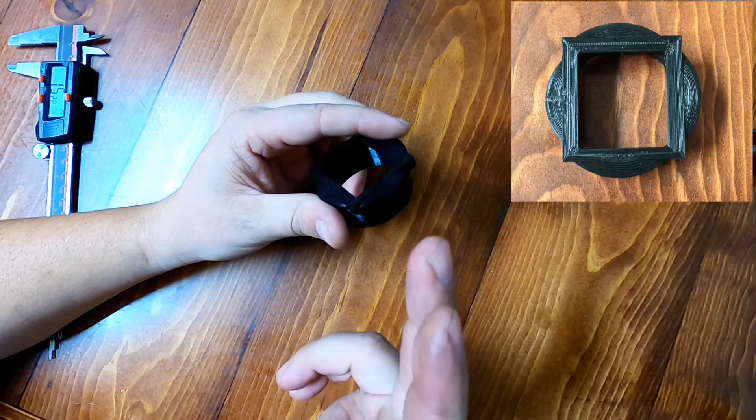Now the design that I made isn't that elegant. It involved a circle, a square, and an oval, or sphere, disc, whatever. Combine three shapes in one, make it a little easier for me to grab right here, but make it basic enough that I can put the GoPro right in it.

And this one, it does fit one way. As you can see here, it does fit fairly snug. Hopefully the camera picks it up pretty well. Fits in fairly snug that it doesn't come out.

So I tried it here as close as I could, but again, this was only a prototype. Didn't even think that it was going to work as well as it is. And it's been doing really, really good.

There's a couple of different ways that you can make this, but this was just mine, and I actually made it in, oh, is that Windows 3D? It was just super, super basic, and I'll go ahead and show you in a little bit what that was.

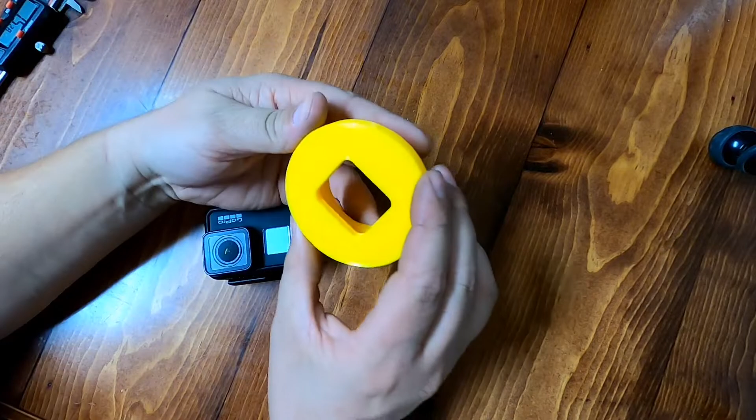But the original piece that I was using was something that a friend had made for me. He found this on Thingiverse. Now, the only thing I didn't care about this is that it did come in multiple parts. It is a lot compared to a little.

Yes, it looks cool. This one goes directly onto the GoPro itself. This one adheres really, really well as well. I think actually a little too much. So it's kind of difficult, but it does look really, really slick how they made it.

It's nice that you can go ahead and just have it like this. So if this is attached to your spotting scope, you can go ahead and put it on, latch it in. When you're ready to take it off, you're done. Mine's just one piece that goes on, comes off.

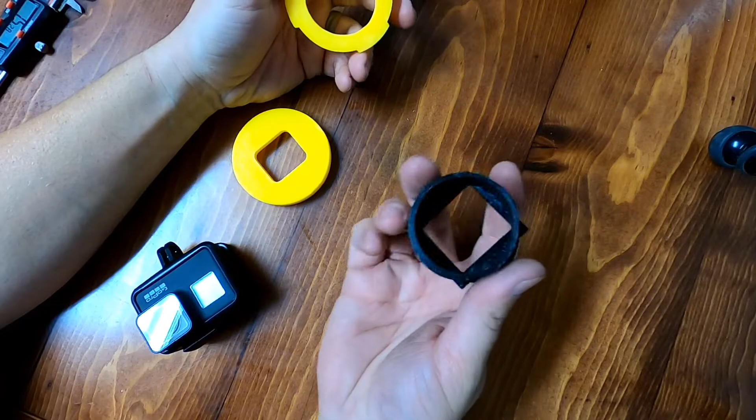The only thing I didn't care about this is that when I did go ahead and try to attach it, it had a lot of give. Now, my friend printed it out and he didn't have all the specs specifically for it, and we were just trying to use this plastic cover that was on top of my spotting scope. And this actually pops right off, so it didn't make too much sense to use this on it the whole time, just because if you try to pull it off, this whole thing comes off, and yeah, anyways.

So yeah, it works, but I didn't care for it. I think this fits the Hero Black 5, Hero 5 Black, and they're all pretty much interchangeable. I think there was just a slight size difference in this, but pretty much the same.

But what I ended up doing, instead of using this, which I didn't care for having on my spotting scope, either one of them I had when I put them on here, it's not like it just fits on and the camera lens is perfectly crisp and clear.

It does take some finagling to go ahead and move it around just to get it to line up properly. It's almost like using your phone if you're trying to look through binoculars and get it to look all clear. It's just that certain angle, moving it in and out, which made it kind of difficult.

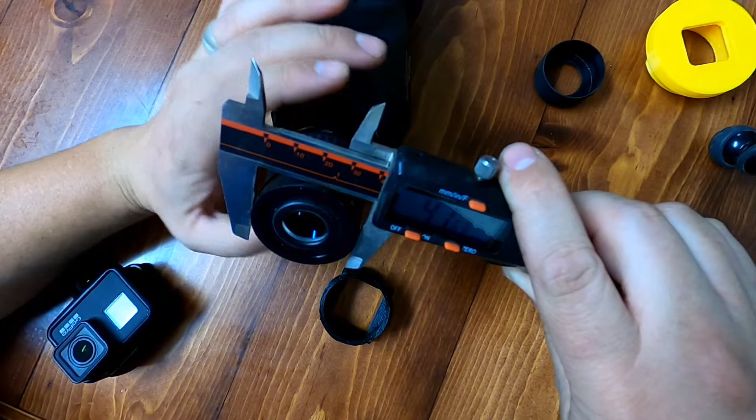Whereas this one, I designed it to be around just this plastic. It's something that it adhered to a lot better. I didn't have as many problems with it. Now this one came out to be about 41.63, obviously all the way around.

And depending on where you put this, it came out to 41.92.

It does fit rather snug, but it's very, very small, and if I do need to turn it, I can maneuver it just a little bit in and out. It's a very small, low key platform that just fits right on it. It doesn't take up too much weight like a phone case would, which I was having some issues with on this spotting scope and the original tripod. This made it just enough that I could move it however I wanted to, and then go ahead and tighten in the pieces, and I didn't have to worry about it rolling or pitching or anything like that. But let's go ahead and jump into the program.

Just go ahead and show you a little bit about how I was making that.

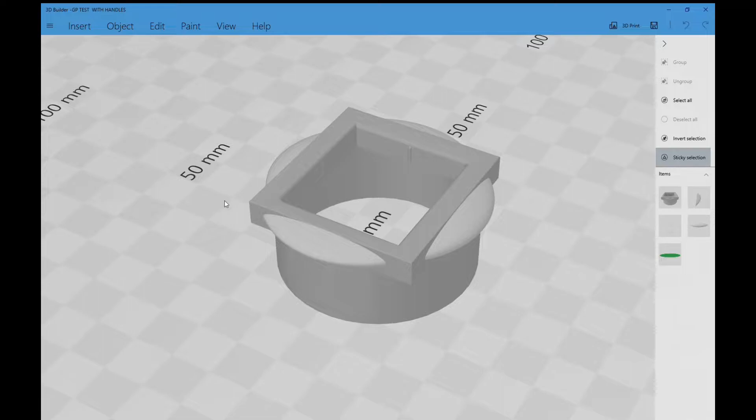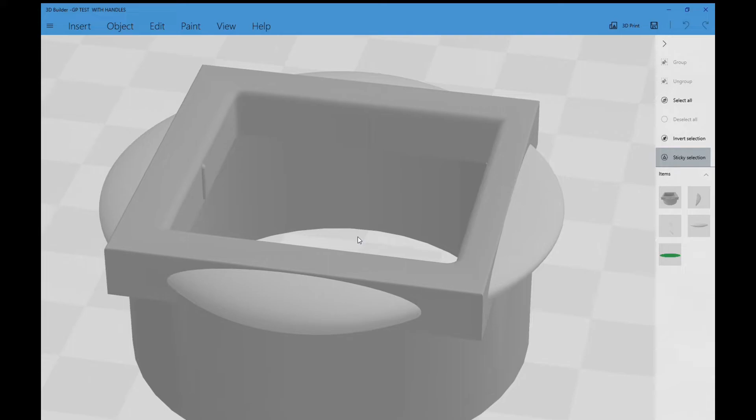And here we are in 3D Builder, this is for Microsoft. I'm just going to take a couple spins to look at the creation. You'll notice there are some small little cylinders here on the side of the cap. This just helps ensure that there's a proper connection to the GoPro and the actual mount, in case there's any wiggle room. But we'll go ahead and open up a new thing real quick and show you exactly how it's made.

This example really only took me about 15 minutes to make, but I'll go ahead and make it really short and easy for you, of any shape or size that you would like. You can move it up, down, left, or right, all depending on the size that you want.

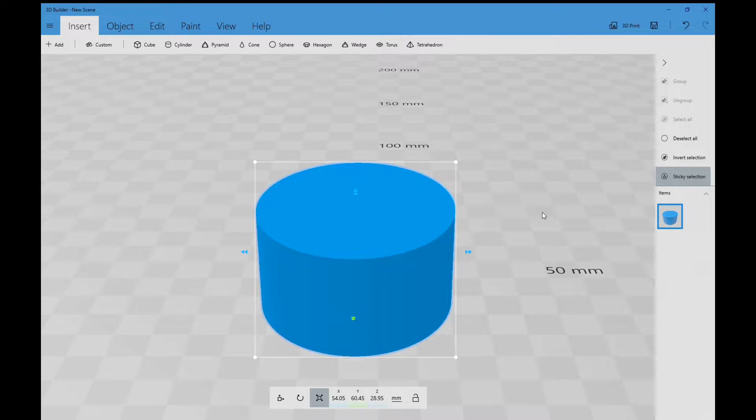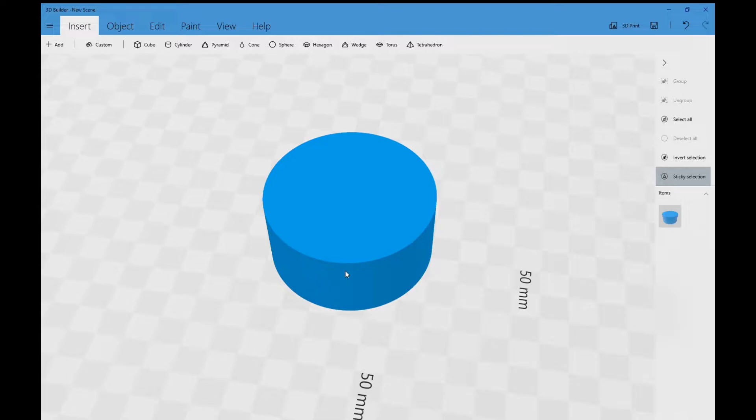So you can do this all manually, or you can actually go ahead and give it a specific exterior size right here and just enter in the value. All these values are in millimeters. I think you can change it to be in inches, but millimeters is just a little bit more precise to work with, and that's generally how these programs are dialed in. But you can convert the sizes that you need, or if you have that caliper, you can get a specific millimeter size, and it's just a little bit easier to work with that way instead of trying to convert the units.

Here we're just going to cycle through a couple of the tabs so that you can be a little more familiar with what we are looking at. First thing that we're going to want to do is go ahead and start creating the hole in the middle of where the scope is going to be seated.

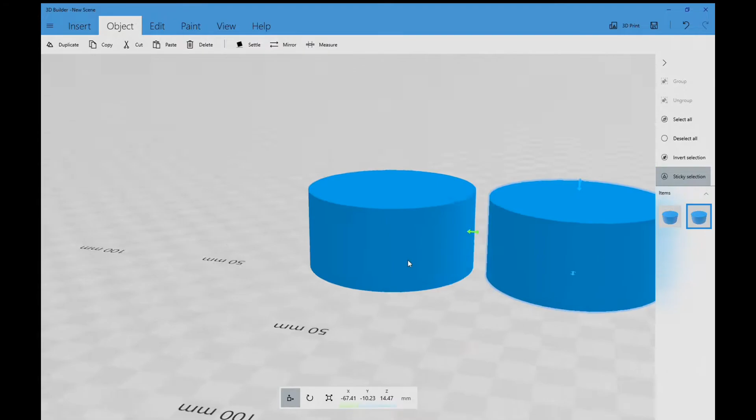So you'll want to go ahead and duplicate your project. It's just a little easier this way than trying to create one from scratch, since you already kind of have the same dimensions. We do want to go ahead and make it smaller. Again, for this example, I'm just punching in random numbers, but you'll want to put in the specific value that you need, so that this will fit over your project.

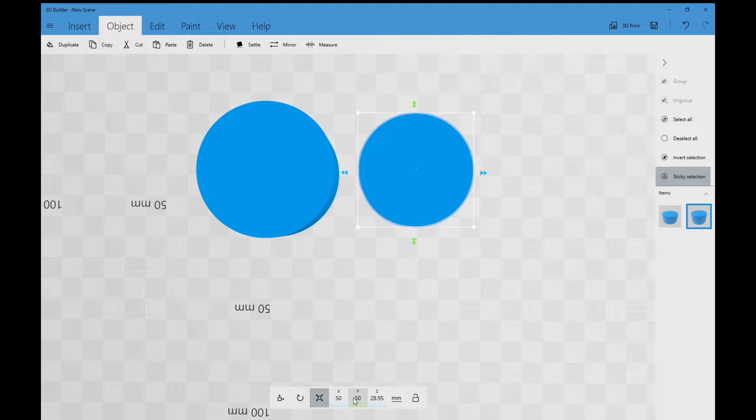So the current grayed out function that you're seeing on the bottom is the actual height adjustment and width adjustment. If you forget the setting is on there, it can tamper with the actual size of it, but you can use Control-Z to go ahead and back out.

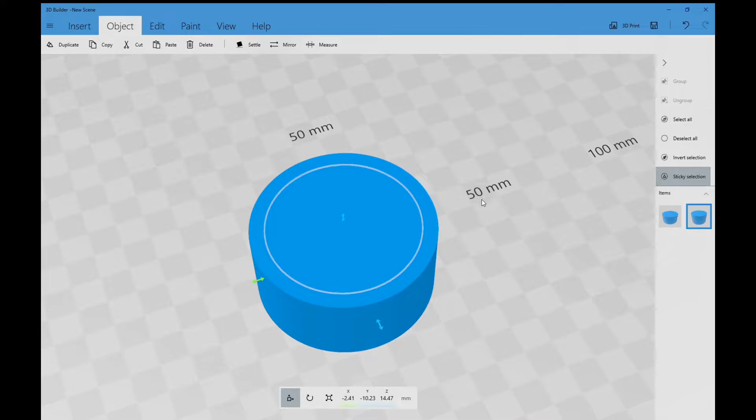The current setting now that you see there is the move function. Anytime that you do move it, it usually tries to snap it into place. Basically what that means is if you're close enough to the different axes, it'll go ahead and try to push it into where you need it to, so that way it kind of seats it automatically and you don't have to try to dial it in specifically by hand.

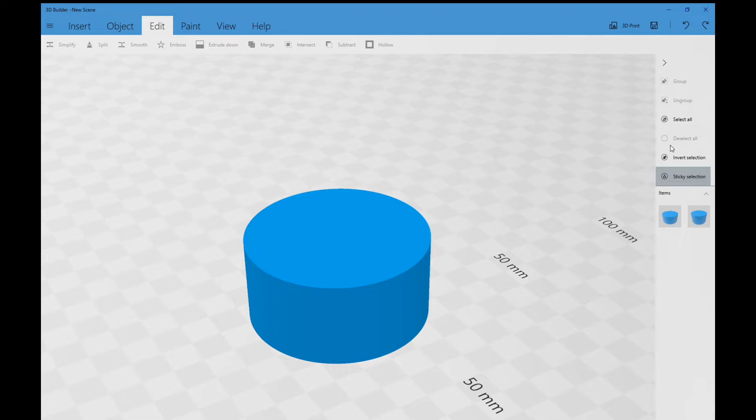So you'll want to go ahead and select the inside cylinder for this next part to go ahead and hollow it out.

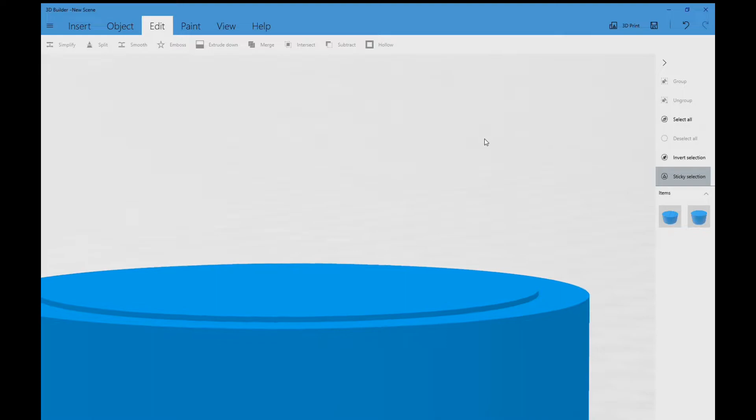I typically like to go ahead and change the height on it just so that way it's a little bit bigger than what the current one that you're working on. So you can see there's just a little bit of a lip here. I just find that works a little bit easier for me.

So you'll want to go ahead and select the object that you want, and then we hit subtract. What that does is completely hollow it out, and it removes the piece that you were just using, and then you're left with the current project.

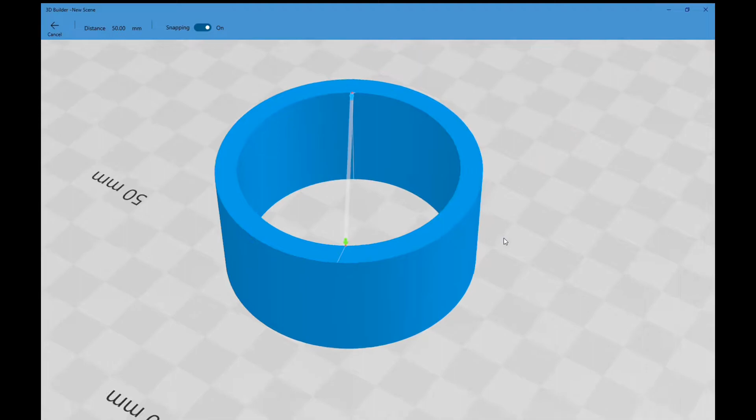If you have any kind of question about how big a specific piece is, interior or exterior, you can go here to that measure function, and on the top left side you can actually see exactly how big that area is. So if you need to change something like that in the future, you can, but it's just a nice reference in case you need to look at some details.

Now we're going to go ahead and start working on our frame. So you'll want to go to Insert, and under Cube, generate what you want.

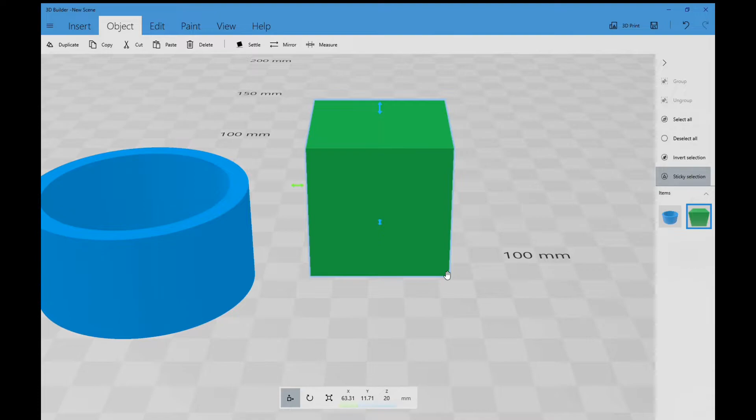Set that off to the side, and we just want to make sure that it's settled, because sometimes it does place it on top of the current object you're working on. So by settling it, it just pushes it down to the bottom of the mat, and then you can go ahead and start adjusting the height to whatever thing that you need.

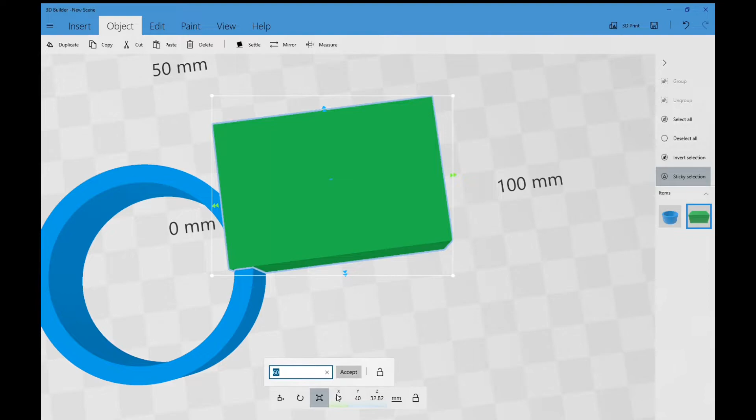Change the height of the cube to be however deep that you need it to be, and then you can adjust the exterior width as well, so that way it's just wide enough so you can compensate for carving out the inside of where the GoPro lens is going to be.

You don't want it to be too thin. You can make it as wide as you want. For this one, I just oversized it, and we'll actually shrink it down here in a minute, so that way it looks a little bit more relevant to the size of the scope.

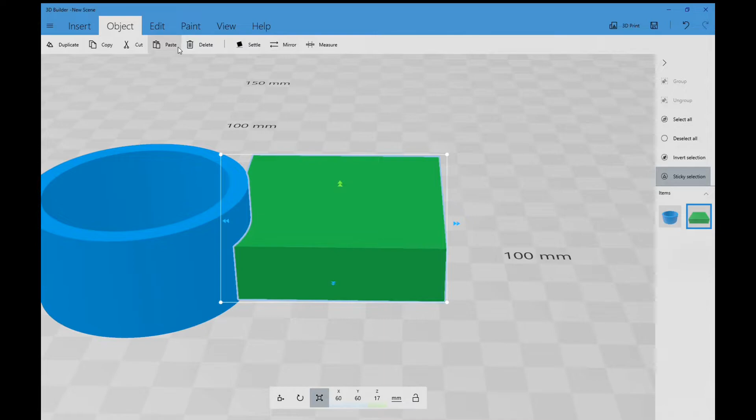Now we're going to duplicate our square, so that way we can cut out the inside and match it up for our GoPro. Again, this is just a random number that I'm going to be putting in here just to be able to show you how you can make that.

Once you've got your values entered in, just go ahead and move it over. It should snap it and center it into place.

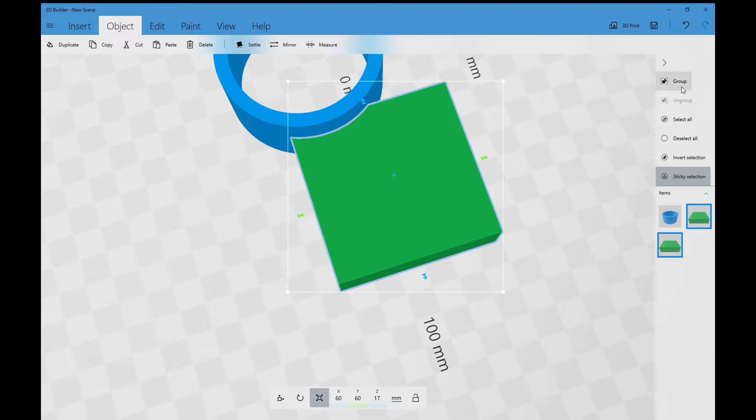Just because it's kind of in the way of the circle, I don't want it to go ahead and cut it the wrong way, so we're just going to group it together. Then we're going to ungroup it and select the inside square, and make it just a little bit taller than the current cube.

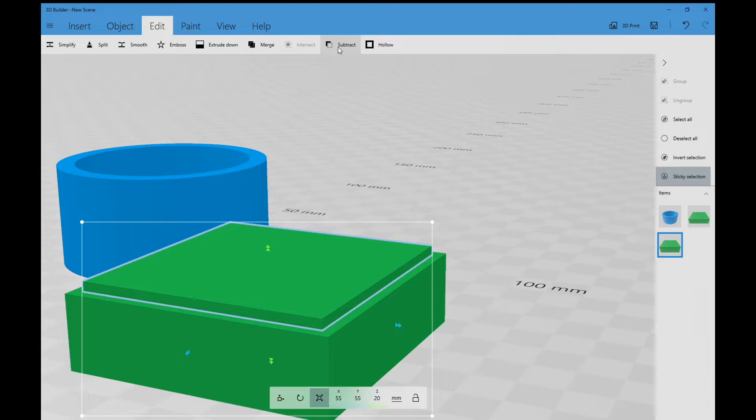Now we're going to subtract it, admire our work, and place it on top of the sphere.

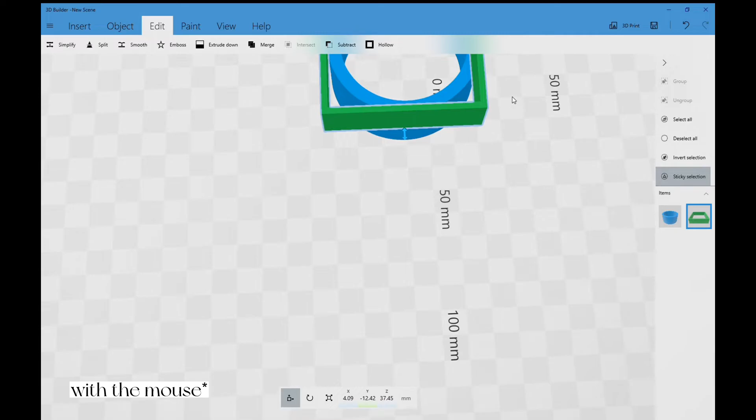Now for some of the controls, you are going to be using the right button to go ahead and move the screen around, but to be able to move it up, down, left, and right, you'll use your left button.

And for this, we're just centering it into place, and it should kind of snap in there. But then you'll want to go ahead and actually change it to the real true values that you have, unless you already did that in the first place.

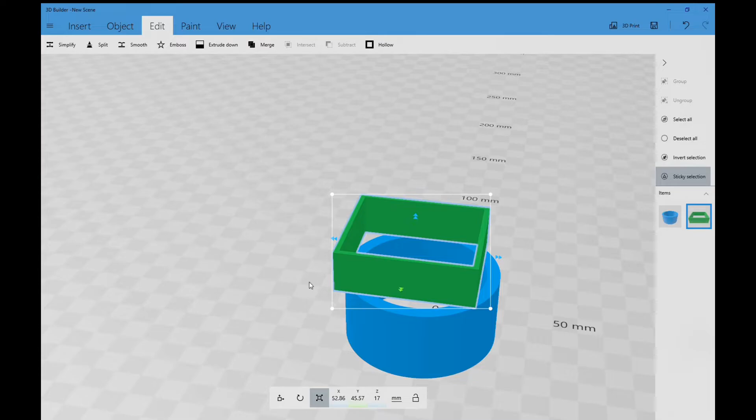But here, again, I'm just trying to line it up so you can see how proportionate it needs to be according to what the scope is and your GoPro. And again, just using that right button to go ahead and click on the screen and just kind of move it around so that way you can kind of see where you're going.

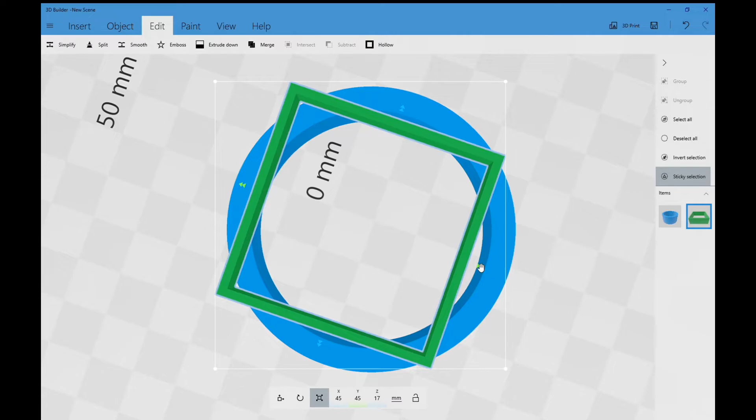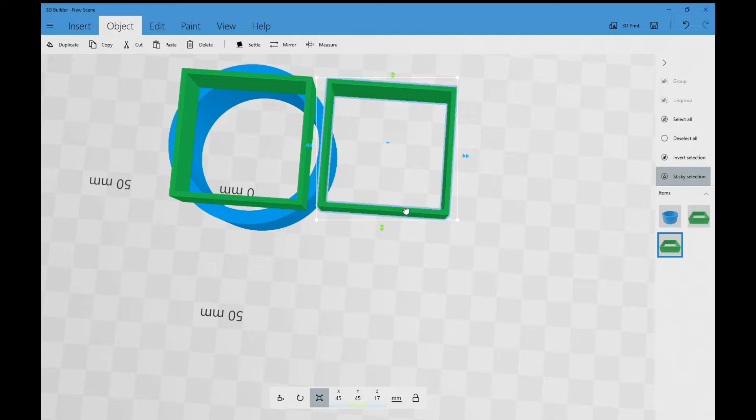Now that everything's been settled the way that we need to, size-wise and position-wise, the only concern that we have now are those gaps on the sides between the mounts. This will allow in some light, and we really don't want to allow any kind of light. So what we're doing is duplicating the frame that goes to the GoPro, so that way we can create that sphere, or anything that you want, just to cover that up.

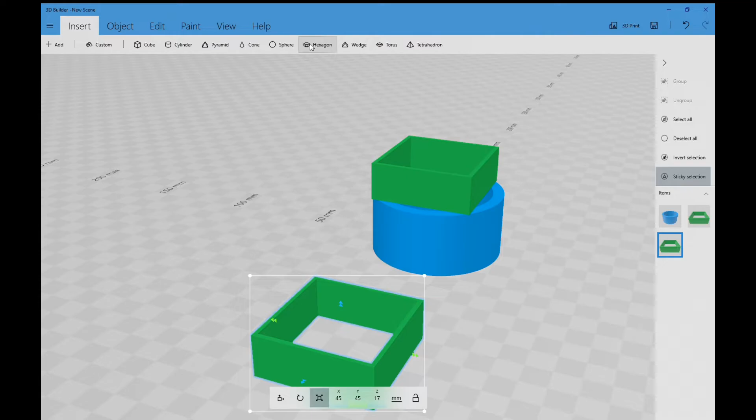You could actually make the box as square as you want, or as aesthetically pleasing as you want. But here, we're just going to make a donut per se, and place that around it, so that way we can get that grip. Grab your selection and seat it around the box. You can line it up as evenly as you want, or oddly shaped as you care. Just make sure that it's settled.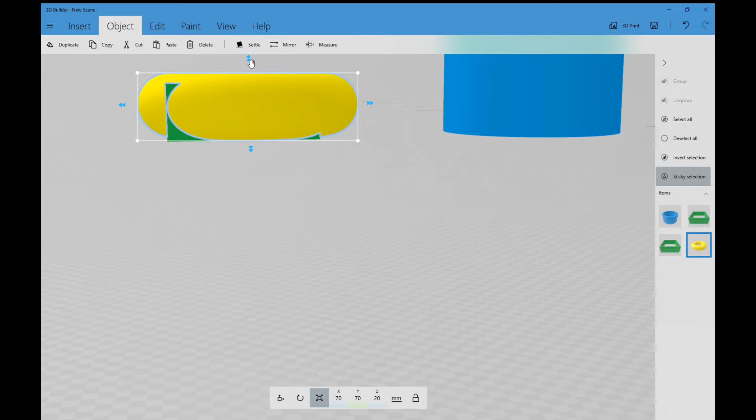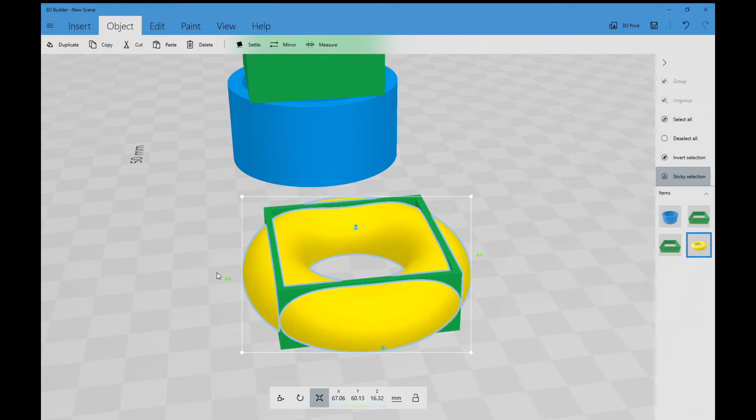Then you can go ahead and adjust it to the size that you want, whether it's thin, tall, anything. For this one, I just went ahead and evened it up and made the donut touch all four corners of the square. Just made it a little more aesthetically pleasing for me. But we're going to actually be adjusting that height in a little bit.

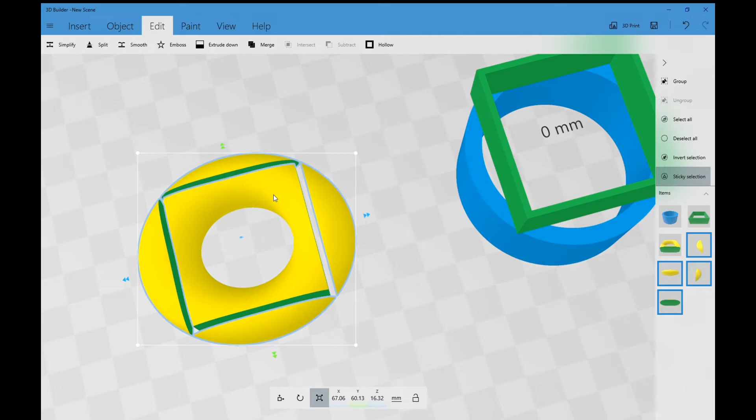Here we're going to start removing the pieces that we do not need and place them on our current one. So we want to remove that square so that way we can cut out all the pieces here. Once you've got what you selected, hit subtract, and now that has been removed. We want to keep the outside edges, so we're just going to click the inside of that donut, but make sure that everything else is not selected, or the cropping will take away what you do not want.

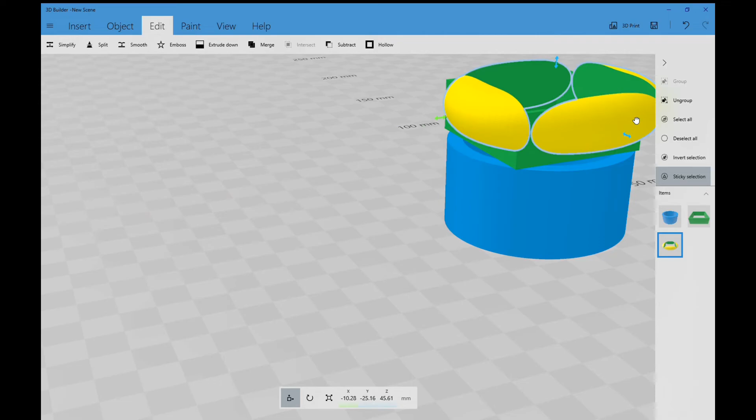Once the extra piece has been removed, we're going to want to group these together to keep them all in place. Change your angle and go ahead and grab the selection, and place it around the current square.

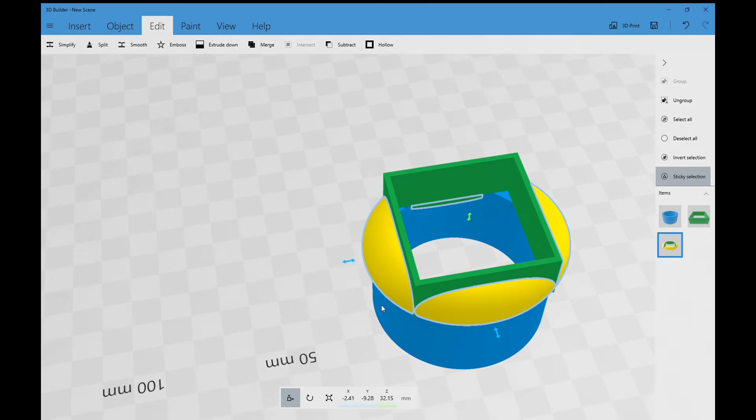Settle it in. Now, one thing that you'll want to keep in mind with this is because it does go past the current cylinder, it is going to probably eventually start hitting the scope. If you can see the little highlighted selection right there, that's just showing the overhang that is currently going through the cylinder and may be affecting the lens itself.

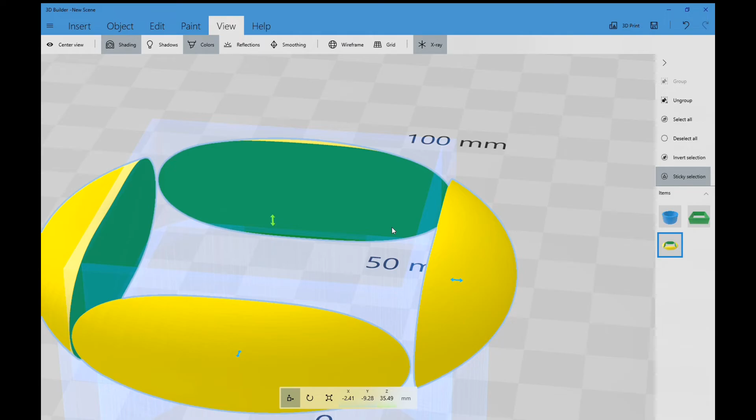So we are going to want to go ahead and remove that, and we'll show you real quick exactly how much overhang we are dealing with, and we're going to go under View and under X-Ray. Now, once you've selected specific pieces, you can exactly see where it is overhanging and by how much. And that, again, can be enough that it affects how your camera is working with the scope and the distance and whatnot. So we're going to need to go ahead and remove that.

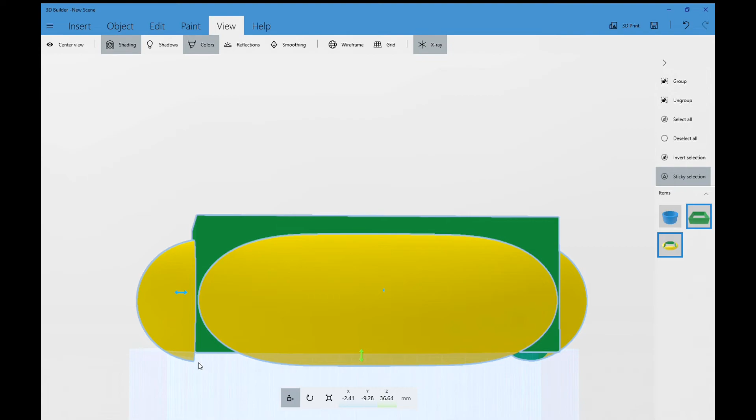So we're just going to isolate the part that we are working on and go under the edit function where it has split, and you'll see a green box that has now sliced our piece. But don't despair, we're able to adjust that to any height that we want.

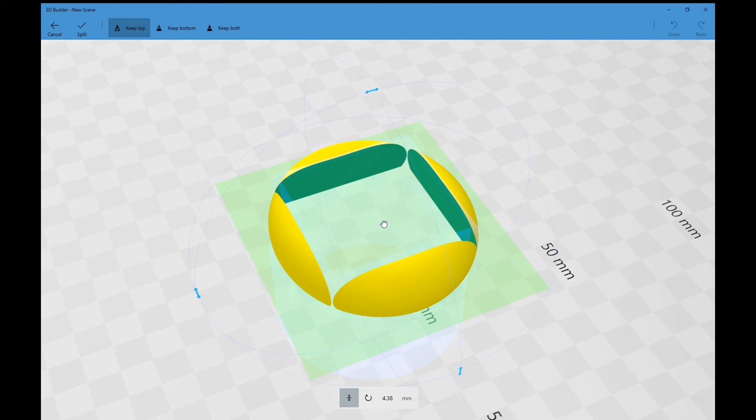And once you've chosen the height that you desire, you'll want to make sure that you're keeping the selection that you need, either up or down or both, and then go ahead and hit Split. Once that is selected, as you can see, it is now much more flush, and it's not going to be affecting our cylinder, and you can go ahead and settle it in place.

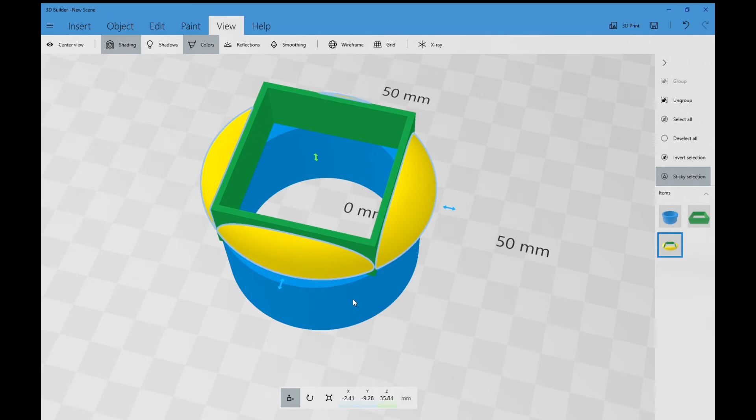Once you've concluded your project, you'll probably want to just go ahead and group it together and then save it. I like to save mine in the program under 3MF. That just allows me to go back and edit it really easily. But if you're ready to print it, test it out, just go ahead and save it as an STL format, which is what your 3D printer slicer can read, and then just go from there and print out what you need.